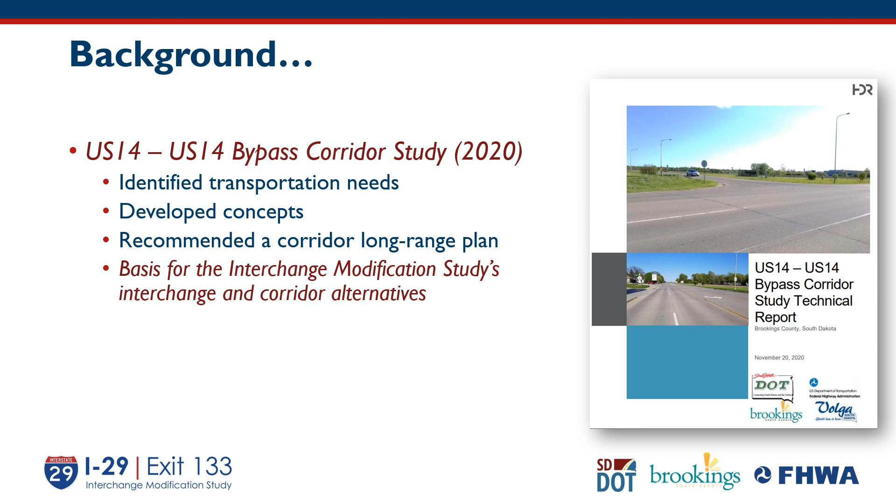The next few slides provide a little background of how we got to where we are today. In 2020, the South Dakota Department of Transportation completed the US 14 bypass corridor study that developed a long-range plan for the study corridor that included the exit 133 interchange and US 14 bypass through the interchange. This long-range plan identified potential future projects and timelines for those projects to help guide the South Dakota Department of Transportation in prioritizing improvements throughout the corridor. Alternatives developed as part of that corridor study were carried forward into this interchange modification study and are the basis for the alternatives being presented as part of this first public meeting.

Moving to 2021, the South Dakota Department of Transportation completed their 2020 edition of the Decennial Interstate Corridor Study. This is a pretty large study that looks at the entire interstate system throughout the state of South Dakota and prioritizes interchange and interstate segment projects from a statewide perspective. Through a ranking process within that study, the I-29 exit 133 interchange ranked near the top and was established as a priority interchange project for the DOT over the next 10 years.

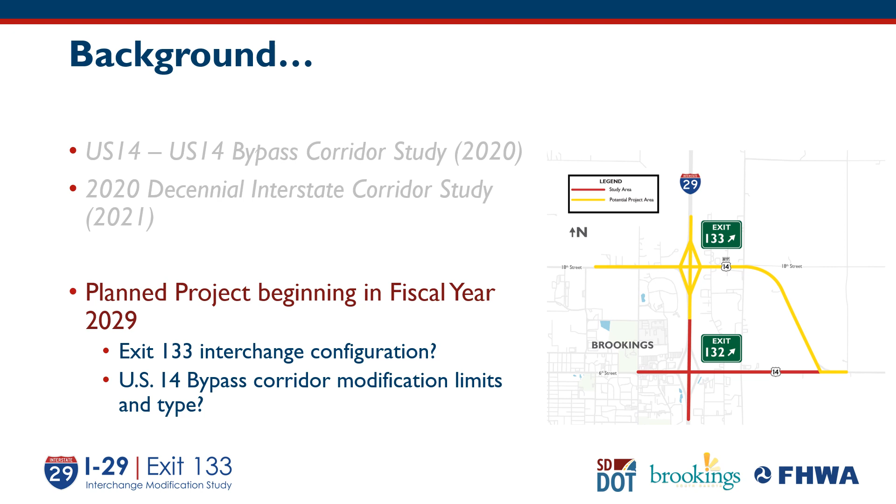There are two key objectives for this interchange modification study. The first is to develop an interchange modification justification report, or an IMJR, and that is the document that recommends the most technically feasible interchange alternative through analysis and evaluation. This document also is part of the South Dakota Department of Transportation's request to the Federal Highway Administration to modify the I-29 exit 133 interchange.

Second objective is to develop an environmental screening report. And this starts with identifying the preliminary purpose and need, essentially what is the purpose of the project and what transportation related needs are we looking to address as part of this project. The screening report also includes a high-level environmental evaluation, and it assists in the alternative screening as we work towards identifying that recommended interchange alternative.

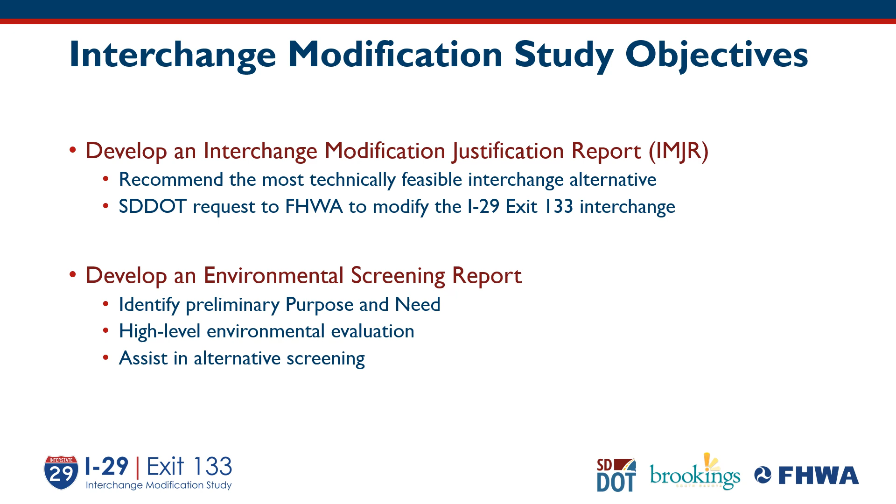We anticipate this study to last for approximately a year and a half. We started in the summer 2022 with some data collection, traffic operations analysis, and initial refinement to alternatives carried forward from US 14 bypass corridor study. That gets us to where we are today. We're seeking your feedback on those alternatives carried forward from the previous study. That feedback will allow us to move into the next phase of the study where we go into detailed refinement and evaluation of those alternatives.

After that, we'll come back for our second public meeting, again ask for your feedback on those alternatives, and from there we'll take that information and we'll move into drafting the interchange modification justification report and environmental screening reports and go through iterations of those reviews. We anticipate that the study will be completed towards December of 2023.

Following completion of the study, the DOT will be able to move into the environmental study, or NEPA, in 2024, also initiate design, which will extend up until construction. And we anticipate construction beginning in fiscal year 2029. And that concludes the introductory portion of this presentation. This next section will present the draft project purpose and need for your review and comment.

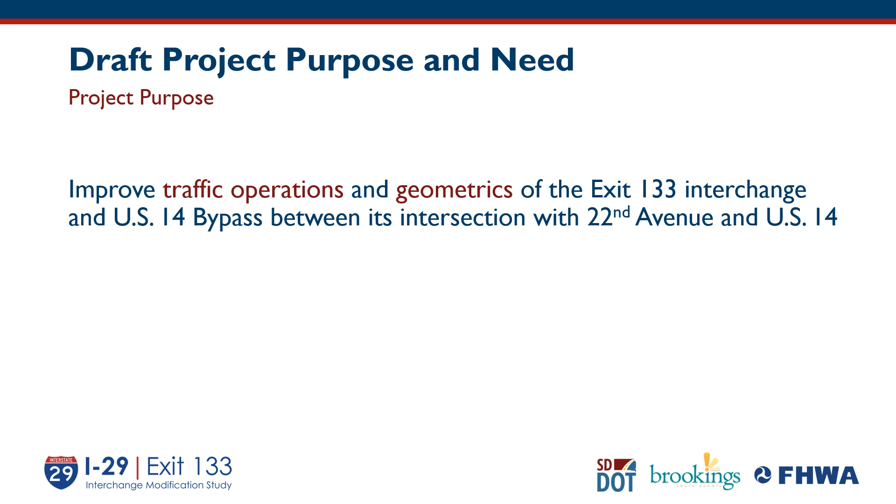The draft project purpose statement is to improve traffic operations and geometrics of the exit 133 interchange and US 14 bypass between its intersection with 22nd Avenue and US 14. There are three overarching project needs, and the first being traffic operations and future traffic growth.

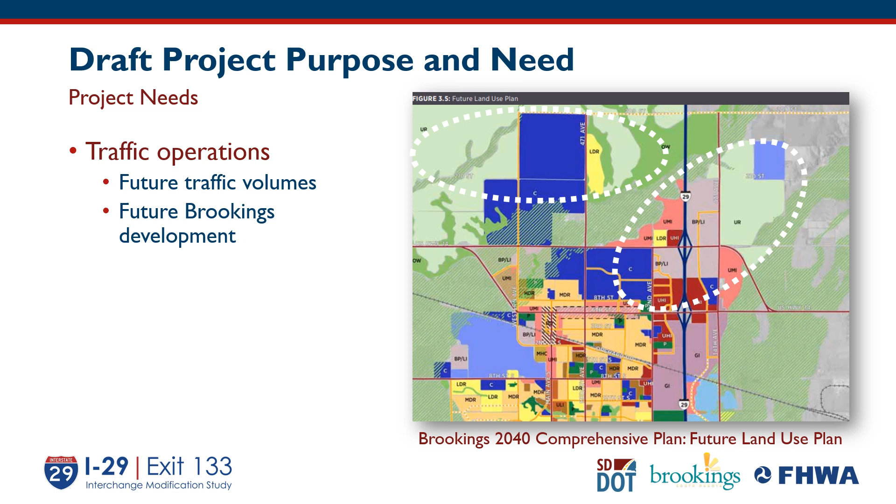Now, while we anticipate that there will be continued growth of traffic just passing through the area on US 14 bypass and within the exit 133 interchange, one of the greatest contributors to this growth is anticipated development within the Brookings growth area, in particular from areas extending to the northeast of the exit 133 interchange up to the landfill, as well as other areas further north and west of the US 14 bypass.

And with those increases in traffic volumes, we anticipate long-range operational needs at the exit 133 ramp terminal intersections and other intersections along the US 14 bypass corridor. Now, those operational needs certainly do vary from intersection to intersection, but do include looking at certain things such as additional turn lanes or modifying intersection traffic control, or even looking at the number of lanes long range on US 14 bypass.

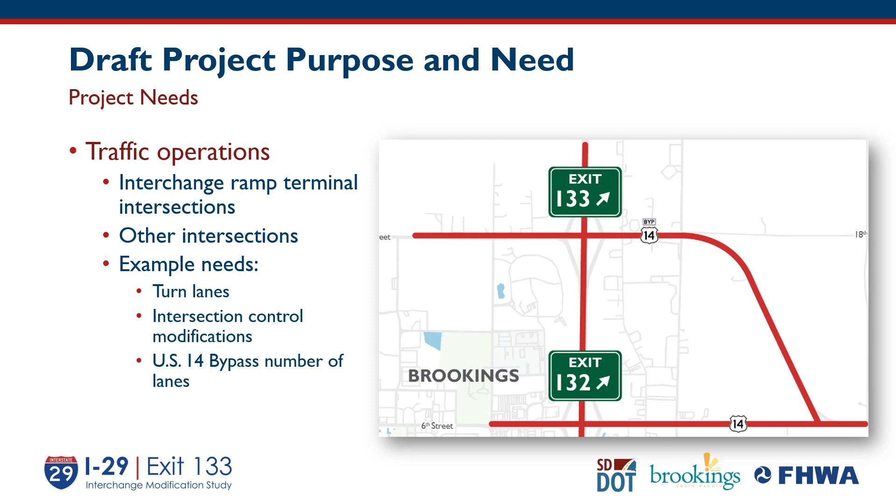The second need is associated with the age of the existing structure. The current two-lane bridge within the exit 133 interchange will require replacement by year 2050. The existing bridge also contributes to substandard width and constraints to accommodating current and future year traffic operational needs at the ramp terminal intersections and across the bridge.

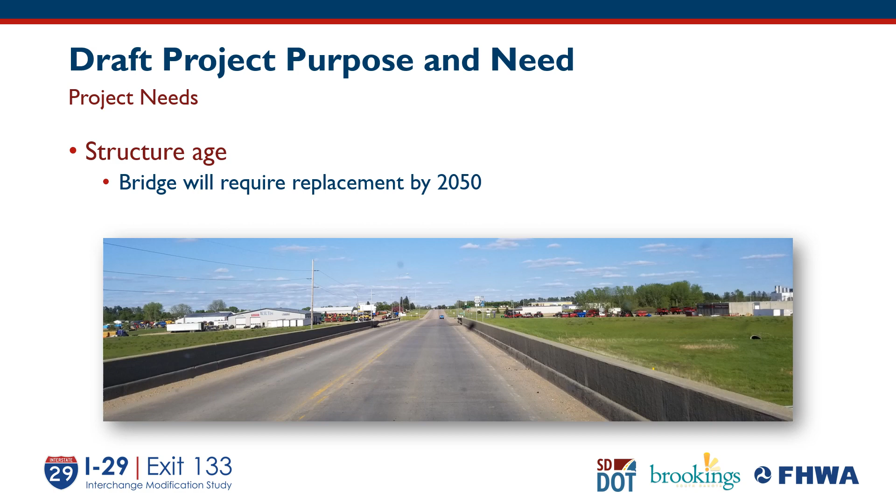And the third project need is related to improvements to geometric performance. And that's associated with curvature, sight distance, and other geometric needs with respect to current design guidelines, as well as long-range traffic operational needs at intersections along the US 14 bypass corridor.

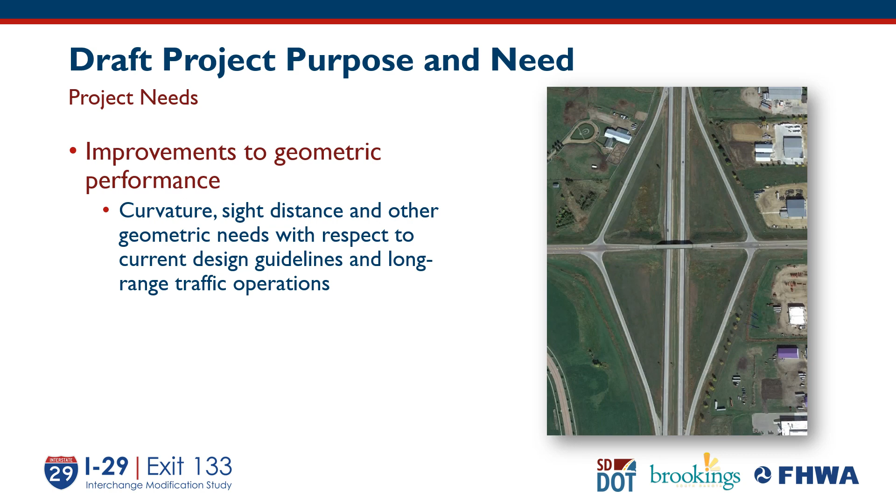Three project goals were also identified to reflect desired project outcomes beyond the transportation needs identified in the purpose and need statement, and also to balance environmental and transportation values.

First goal is to accommodate longer combination vehicles, or LCVs, within the exit 133 interchange, as US 14 bypass is a designated LCV route. The second goal is to support recommendations within the Brookings Bicycle Master Plan and improve multimodal connectivity throughout the area. Third goal is to create alternatives that are compatible with planned ITS improvements, both along I-29 main line, but also US 14 bypass.

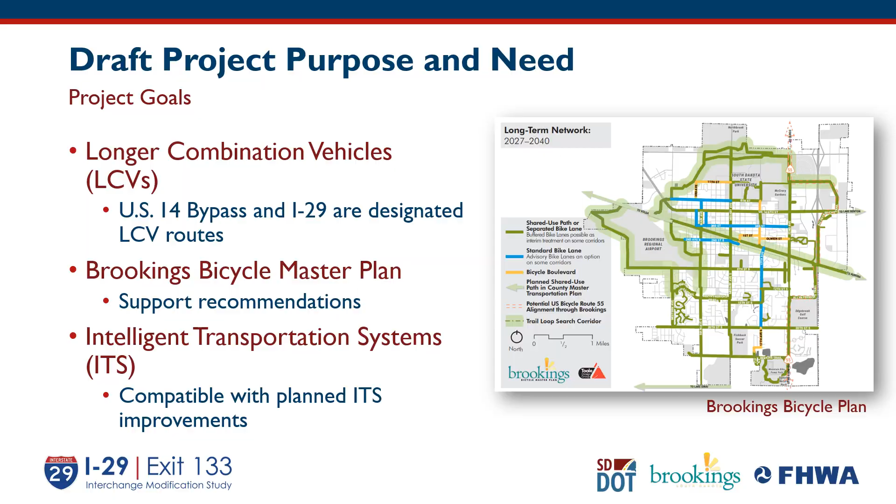This next section of the presentation provides a brief overview of the preliminary alternatives being considered as part of the Interchange Modification Study. First, we'd like to start with the no-build alternative, or the do-nothing scenario. A no-build alternative is applicable to all segments along US 14 bypass corridor and at the exit 133 interchange.

And the one thing I do want to stress is that just because the South Dakota Department of Transportation identified a fiscal year 2029 project, that does not require that there is modification to the entire potential project area. There could certainly be segments of the US 14 bypass corridor where nothing is done as part of the planned 2029 project.

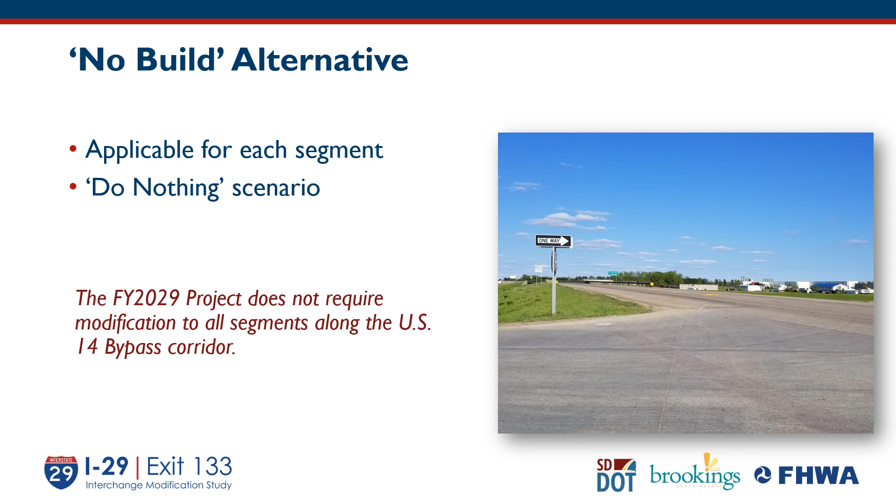Moving to the build alternatives, or essentially those alternatives that reflect modification to the US 14 bypass corridor or the exit 133 interchange, there are a number of similarities across all of the build alternatives. Each of the build alternatives meet long-range traffic operations goals for intersection and corridor level of service. They maintain or improve safety. They replace the interchange bridge. They meet current design guidelines, and they support project goals.

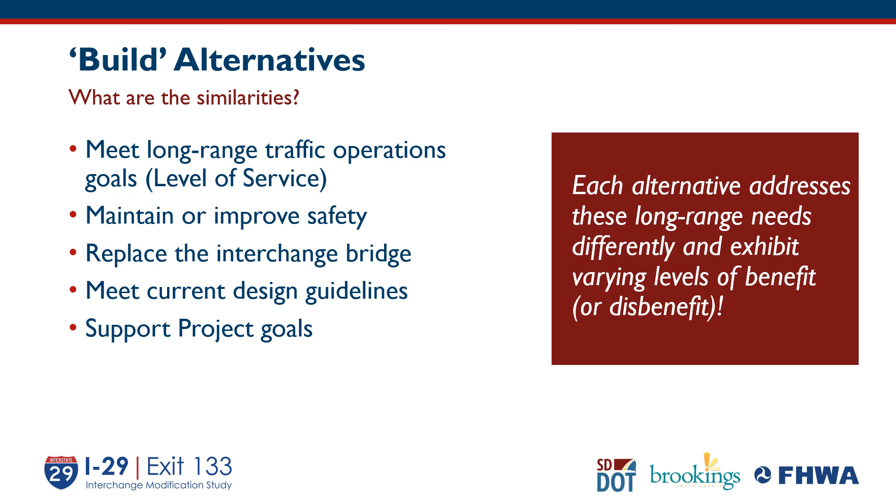However, each of the alternatives address these long-range needs differently and exhibit varying levels of benefit or disbenefit, which we'll talk about here in the next few slides. The first difference is the number of lanes on US 14 bypass across the alternatives. There are alternatives where we maintain the existing 3-lane section and add a shared use path on the south side of the corridor.

There are also alternatives that increase capacity by increasing the number of through lanes on US 14 bypass to 2 lanes in each direction, and then incorporating either a raised median or a 2-way left turn lane. Those alternatives also include a shared use path on the south side.

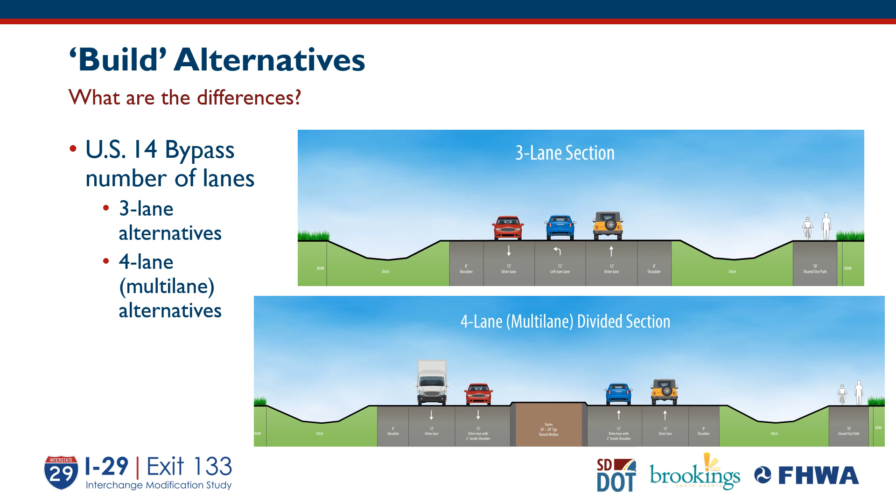A second difference is related to the intersection modifications. Across the various alternatives, you'll see different lane configurations, turn lane lengths, and traffic control, whether intersections are signalized or incorporate stop signs. The multi-lane corridor alternatives also incorporate positive offset left turn lanes, similar to what you see there at 69th Street and Western Avenue in Sioux Falls.

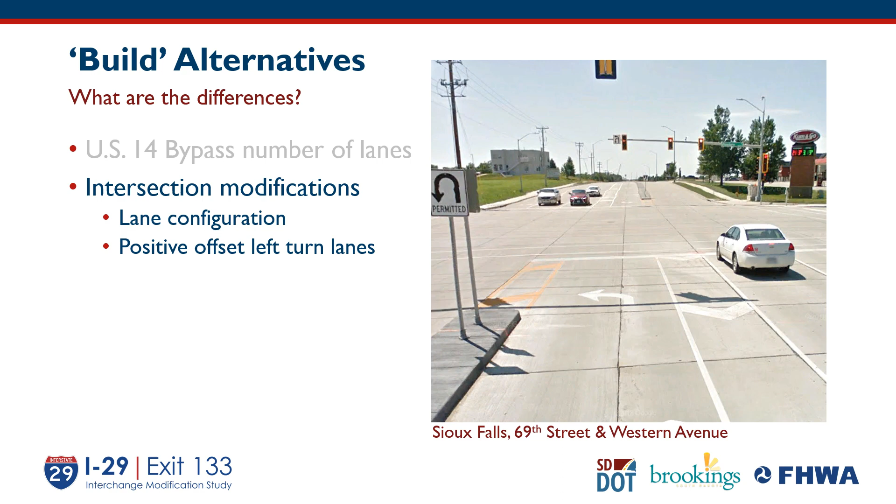And these are instances where we shift the left turn lanes as far left as we can to improve sight distance for left turning vehicles, so they can see around opposing left turning vehicles in the approaching through traffic. A third difference is related to access management. Across the alternatives, you have varying levels of access management associated with raised medians, incorporating frontage roads, or individual driveway access modifications, such as converting full access to 3/4 type access or right-in, right-out access.

But the one thing I do want to stress here is that access management is not taken lightly by the study team. The extensive national research has proven significant safety benefits by managing access, reducing conflicts, and providing safe opportunities for traffic to turn to and from major roadways.

There was a predictive safety analysis completed for the study, and it highlights the expected safety benefits associated with each of the alternatives. So if this is something that interests you, I certainly encourage you to reach out to project representatives as part of this open house.

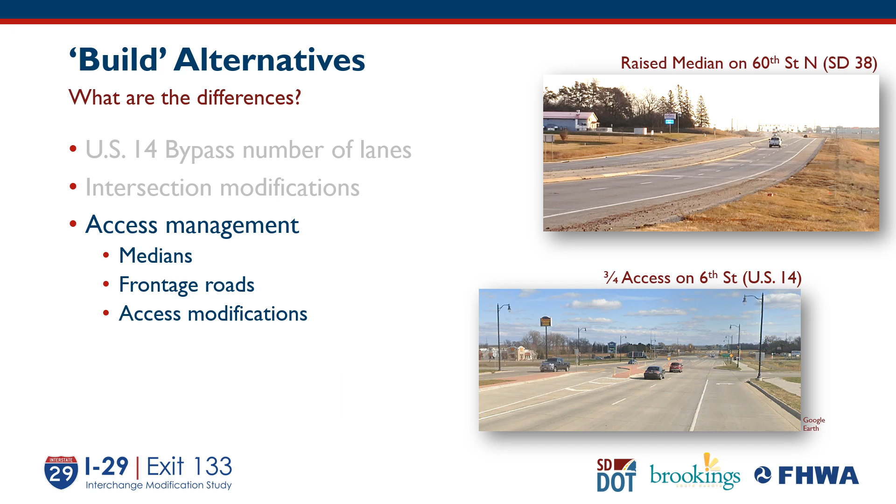And finally, we want to provide a brief overview of the various alternatives developed here for this first public meeting. The alternatives are broken into different segments based on their location on US 14 bypass. The first group of alternatives reflects those west of I-29 from just east of Jackrabbit Avenue to 25th Avenue. Second group of alternatives reflects the I-29 exit 133 interchange.

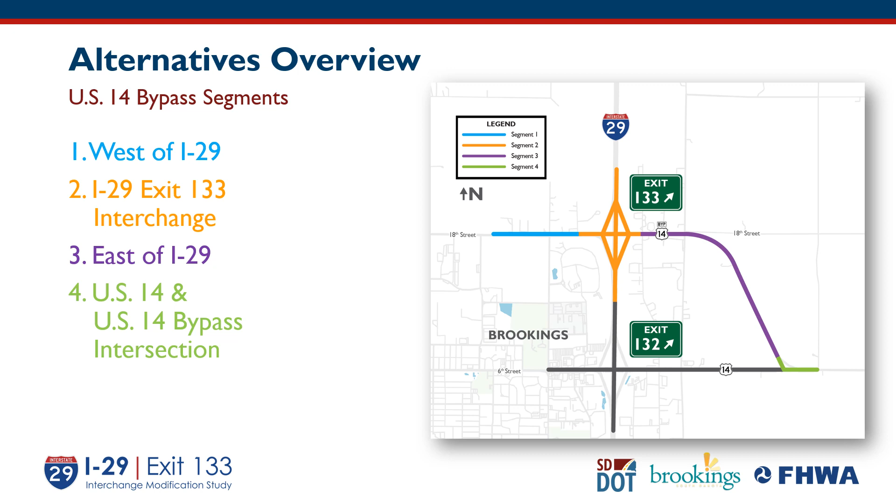Third group of alternatives reflect those east of I-29 from 32nd Avenue east to just north of the US 14 bypass intersection. And the fourth group of alternatives reflects those at the US 14 and 14 bypass intersection. The first segment is west of I-29 alternatives that includes US 14 bypass from just east of Jackrabbit Avenue to 25th Avenue. The first alternative is the existing 3-lane section that includes intersection improvements and access management.

A second alternative incorporates a 4-lane divided section on US 14 bypass where we have 2 through lanes in each direction, includes intersection improvements, and then 3 sub-options that look at varying degrees of access management through this area.

A third alternative is a multi-lane hybrid, and this includes the 2 through lanes in each direction similar to the 4-lane divided. But in this instance, there's segments here that include a center 2-way left turn lane instead of a raised median. Similar to the 4-lane divided, the multi-lane hybrid also includes 3 sub-options that look at varying degrees of access management through this segment.

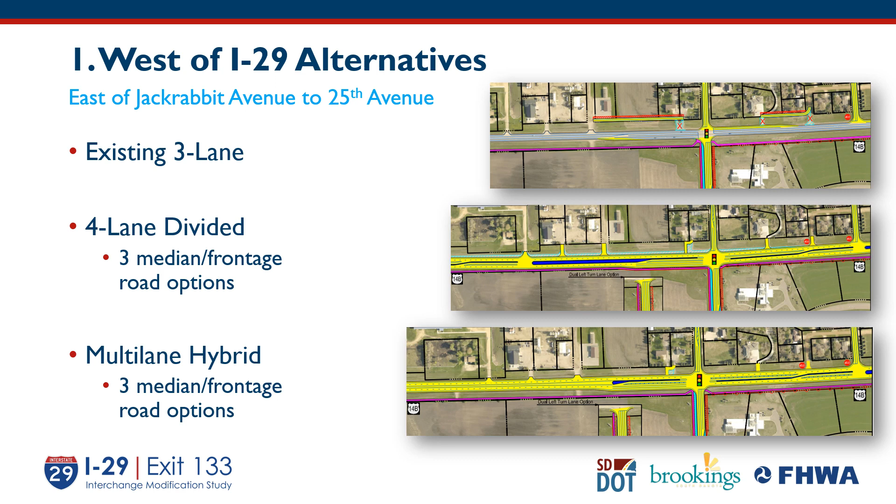The second segment includes the I-29 exit 133 interchange alternatives. All three alternatives include a modified diamond configuration that was brought forward from the US 14 bypass corridor study, very similar to the existing configuration, except that the northbound ramp terminal intersection, or that eastern interchange intersection, is shifted to the west to provide 660 feet separation between that northbound ramp terminal intersection and the 32nd Avenue intersection.

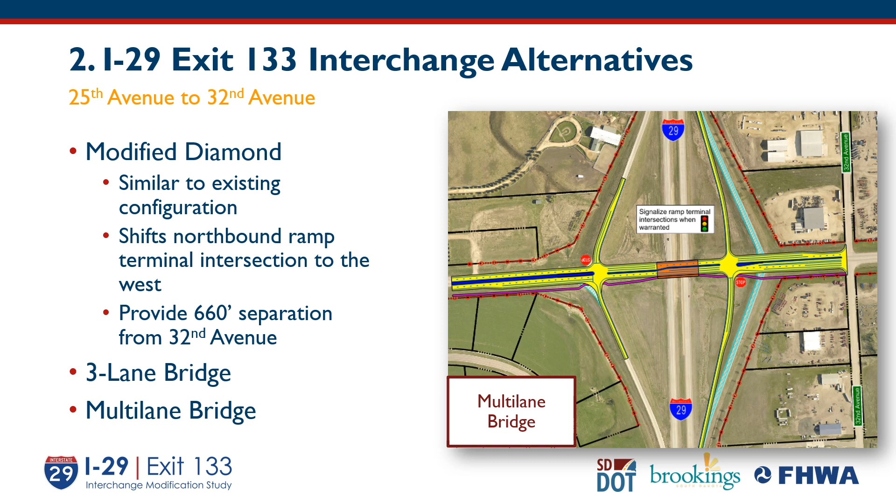There are three alternatives developed. Two of them include a 3-lane bridge, and a third alternative includes a multi-lane bridge, looking at different configurations of number of lanes being carried through the interchange and away from the interchange on US 14 bypass.

The third segment includes US 14 bypass alternatives east of I-29, from 32nd Avenue to just north of US 14. One alternative includes the existing 3-lane section, plus intersection improvements and access management. A second alternative includes a 4-lane divided section, which includes 2 through lanes in each direction, plus a raised median, also with intersection improvements and access management.

And then a series of alternatives east of 34th Avenue look at the existing 2-lane section, incorporating a 3-lane section, as well as a couple connection options with 211th Street and 18th Street.

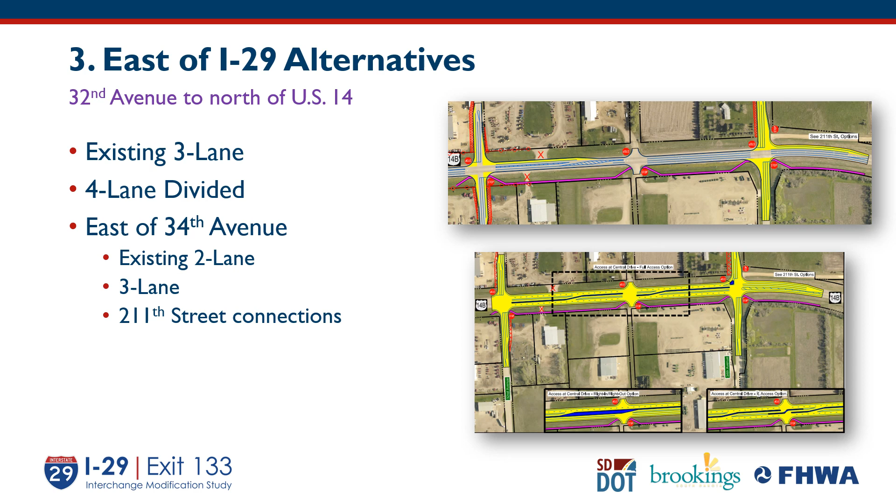The fourth segment includes the US 14 bypass intersection east of Brookings. Two alternatives were developed for this intersection. The first includes an urban intersection that brings everything in tight to a single intersection point and sets up the location for signalization at some point in the future.

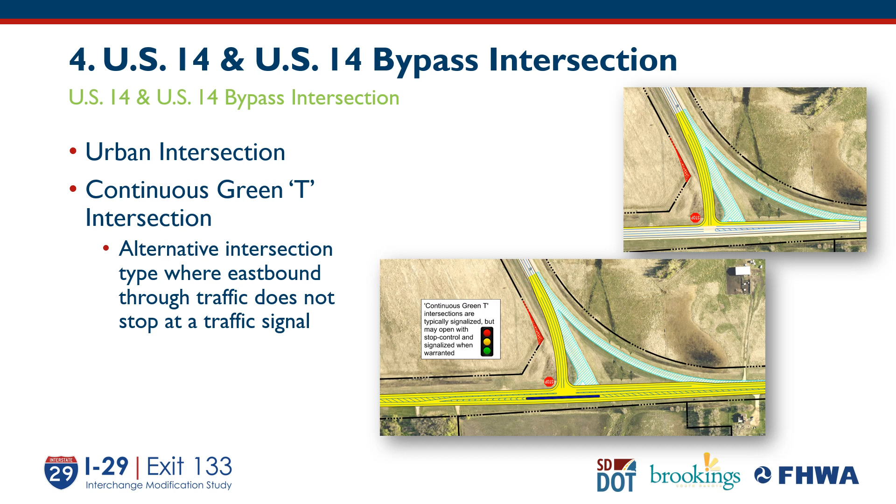A second alternative includes a continuous green T intersection, which also brings things in tight for an urban intersection, but in this instance adds an acceleration lane for southbound to eastbound left turn traffic on US 14, and it also incorporates a median that separates US 14 eastbound through traffic from the signalized intersection location. And this would allow eastbound traffic to continue through the intersection and not need to stop at the traffic signal.

And before we conclude the presentation, I want to touch on a couple highlights here of the public meeting open house. There are a number of display boards with study information available for your review. Those boards include background information such as traffic volumes and future traffic operations analysis, the draft purpose and needs statement, alternatives and layouts of those alternatives for each of the 4 segments along US 14 bypass corridor, as well as at the exit 133 interchange.

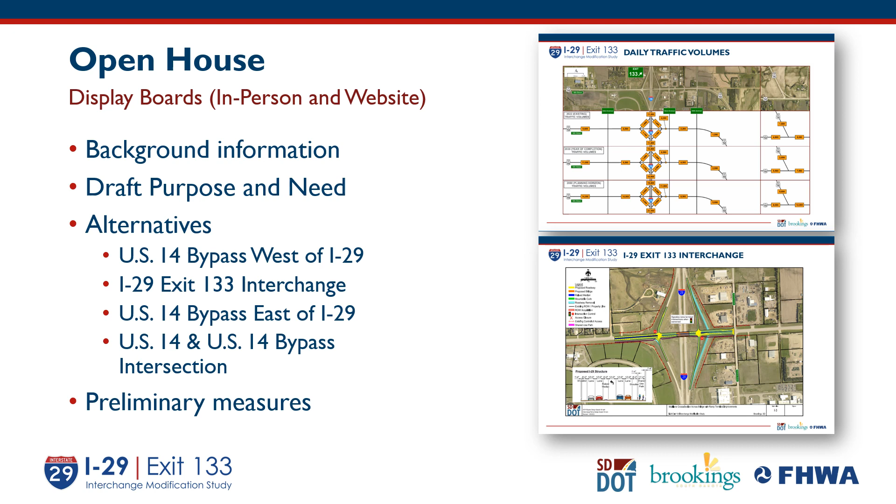There's also a preliminary measures board that includes some information related to future traffic operations associated with each of the alternatives and safety benefits, as well as construction costs to implement each of the alternatives. So with all the available study information, we encourage you to review the boards for this first public meeting, ask questions of study representatives, and ultimately provide feedback on the draft purpose and needs statement, the exit 133 interchange alternatives, and US 14 bypass corridor alternatives.

The one thing I'd like to stress is please help us understand the why in your feedback. For example, if there are things you don't like or think could be improved, please share your concerns and suggestions of what you'd like to see modified. This is the type of feedback we're looking for at this stage of the study as we move into the more detailed refinement and evaluation of alternatives in the next phase following this public meeting.